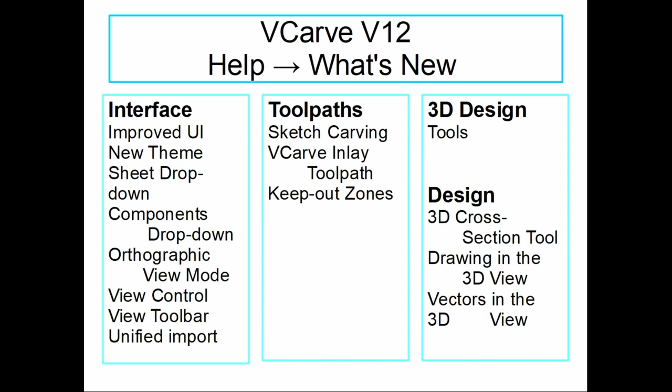Anybody deal with models very much or components? Okay.

So this is the end result of it. We've got the imported... whichever end this thing is on. There we go. Over here, the unified import is this one right there.

The third one from the left, and then the fourth one or the second one from the right. And the one on the far right is for components. So it's STL, et cetera, can be brought in there. So that one's a 3D component, this last one here.

They did away with file save and file copy and all these other things because all those file saves and copies exist in the drop-down menu. So it was just real estate that they were trying to pick up there.

Down here is some 3D modeling tools that are pretty nice. You used to have to jump all over the place to get them, and now they're right out in the open. These two toolbars right here are toggle toolbars, and they start toggling off in and out.

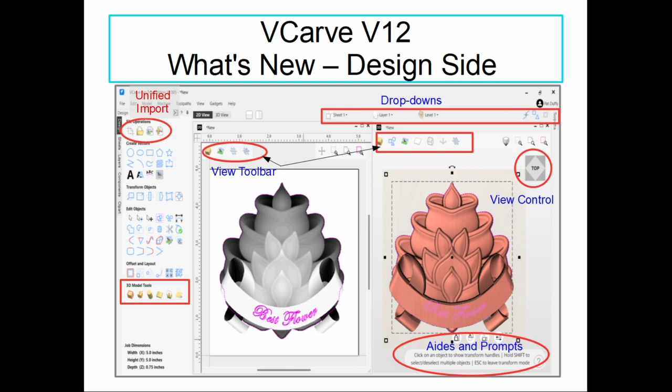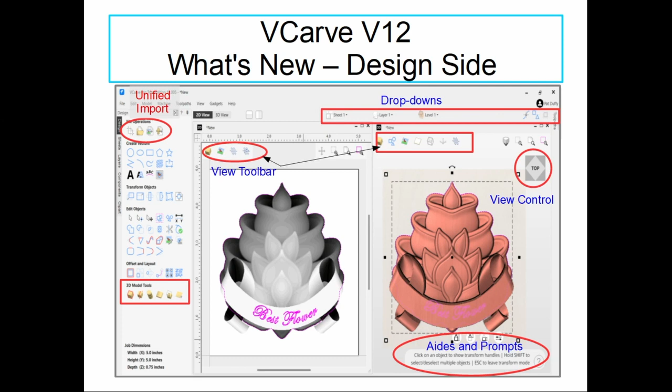This guy's nice because you can now start to rotate all around a model in an organic way. Doesn't mean much for a 2D or 2.5D, but it means a lot for model creation, because now you can look down from the top and see if the ribbon actually protrudes well enough from the flower to make it look real, or if it protrudes too much and makes it look too heavy.

So all of these things are available on the design side.

Any questions? Did anybody fool around with any of these and have any problems? Or no problems? Good, okay.

Now on the toolpath side, one of the things I found out is the best flower was actually, the word was actually right on the ribbon over on this side, on the design or vector side. They're right here, it kind of slid off, and it has to do with the perspective. Don't worry about it, it will all work out. It'll all actually get put onto the ribbon.

However, this is the big item right here. To me, when I'm doing modeling, it was always a real pain to adjust the height and to adjust the height of each component.

In this particular model, when it was first brought in, and we'll see later, the ribbon was actually sunk into the flower, which really looked terrible. I mean, it shouldn't look that way. So you have to figure some way of advancing the ribbon out of the flower or diminishing the height of the flower, or you could tilt it one way or the other.

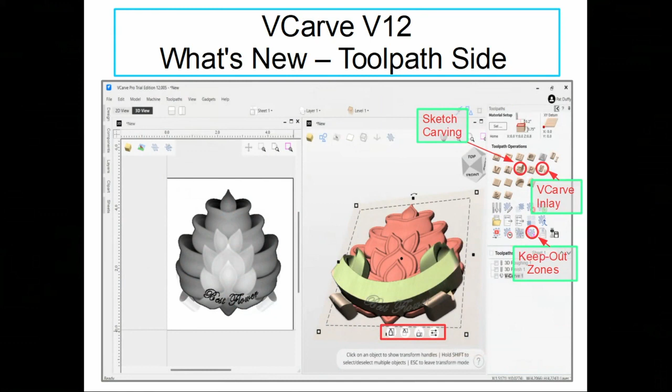You're going to remove the top spoil board? Yes, I'm going to, later this summer, right after the fair. I want to come in and spend all day Tuesday on one and then next Tuesday on the other, and replace the entire spoil board on both of them and get them back into good shape.

So these are the view control again. Okay, look into it, this guy's great. If you click on the word 'top,' it automatically rotates and positions itself to the top.

If you double click on it, it goes and presents the bottom. And you can actually click on either of these triangular sides, and it'll begin to rotate it in a side view. Isn't that the orthographic views?

No. It's being able to see the top or the side perspective, and they call it orthographic in this thing, slightly different. I had to click it 2 or 3 times before I figured out what it was doing, and then I started measuring things, and I said, 'Oh yeah, now I can see what they're talking about.' We'll take a look at it.

Good, these are again the toolbars. This is the orthographic toggle view, that's the one right there, the one with the 3 little things. The only way you can tell the difference is those 3 little fingers appear slightly different in one view than the other, and I'm not sure which is which.

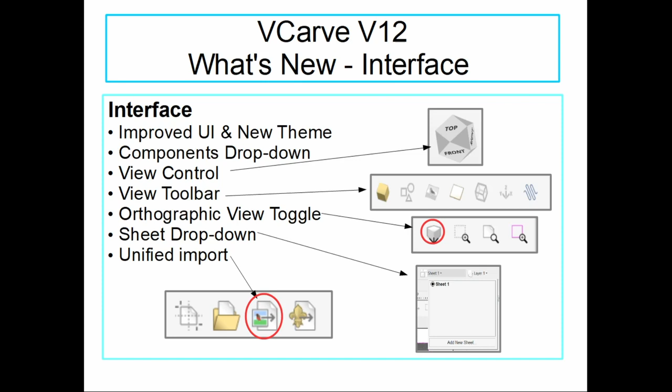This, you just surround an area that you want and click on this, and it'll fill the screen with that area you've selected. And let's see, unified import is right here, and this is your component import.

And sheets, you guys haven't used sheets yet, huh? Oh man, you don't know what fun is. Come on, sheet in there. What? That's a good sheet. Well, I was going to short sheet it, but you got that? Okay, where is it hidden?

Okay, we used to have some real nice functions. We could make a nice smooth curve. You'd hit a point here, a point here, a point here, a point here, a point here, a point here, and say curve, and it would now smooth this curve out real nicely for you.

No longer exists. You can do a 3-point curve, so you hit a point here, a point here, and a point here, and it'll make a nice little curve. You can't do anything greater than 180 degrees, so you can't hit one here and one way up here, because it turned out to be more than 180 degrees. The software, I think, barks at you a little bit.

But now this curve is under the freehand drawing. We have always had freehand drawing, but now you can adjust the smoothness of your freehand drawing. So you draw the curve that you want, which is not as easy for me as I would have thought, but you draw the curve, adjust the smoothness first, and then you draw the curve, and you can actually make that curve pretty smooth, even with a jagged line going through it.

No way. Throw away the text, go back in, create the text in the box, and then it worked perfectly. So the box becomes the boundary for the graphic, and if the graphic exceeds the length of the line, then you're going to get this message. I tried fixing it, and it was much easier to just erase and start all over again.

Boundary vectors, those used to be in the top of the design, if you recall. There was a little funny dotted thing with kind of an arrow, and I could never describe it well. Now it's down at the bottom on the left-hand side. All you do is select everything you want a boundary for. For those of you who have dealt with 3D modeling, you have to do that if you're going to cut the model out. So you just define that as select everything you want, click on the boundary, and it drops it right in.

Next thing is where to find help. Help can be found best at the help contents, and this is right inside of VCarve. So go to help contents, excellent source.

Now I'm not sure, you run Apple, don't you, Paul? No. Anybody else run an Apple? Okay, I'm not sure how this is going to work with Apple.

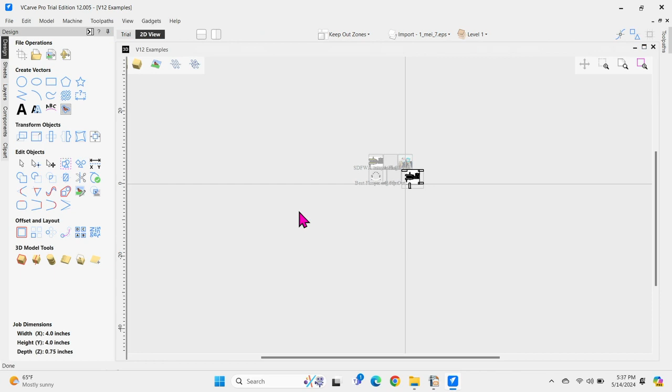Come on, good, came up. And again, I'm signed in, okay? And if you have any doubts, you can always go to Help and About VCarve Pro Trial.

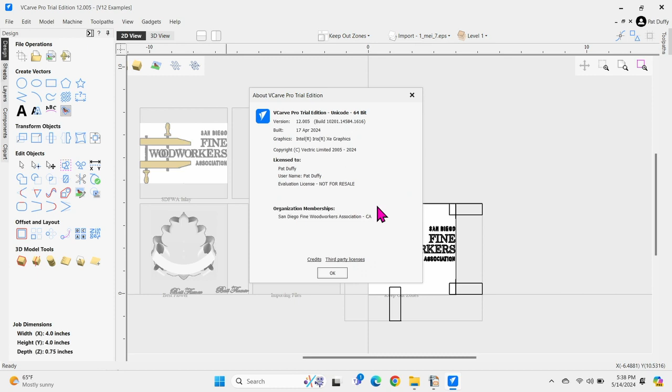It should show you San Diego Fine Woodworkers here. If it doesn't, talk to me - quietly, but talk to me. Okay, but yeah, it should all go up there. And you'll see that we're never going to get out of the trial edition, and that's one of the aspects of a makerspace. You don't get the full bore version. There's a couple of things that are going to be missing, but they shouldn't be insurmountable.

One of them is export - we can't export files out of this, okay? Unfortunately, it would be nice to, especially now that they have slicing.

But let me go to the easy one, or the nice one first. Let me do this - okay, San Diego Fine Work, that's the same file that I built out of this one. And I'm gonna make an inlay out of this. I've already imported the JPEG, I've already done the tracing, okay?

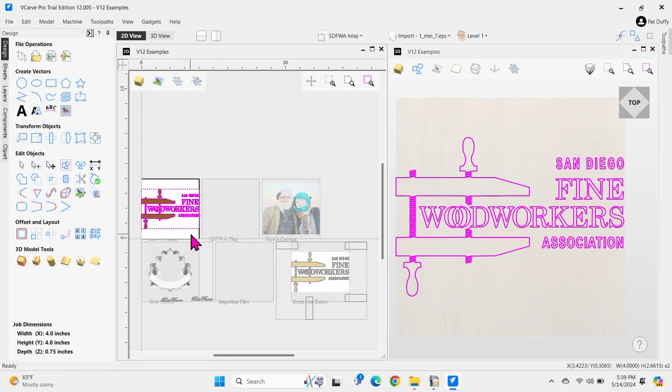Nothing's changed there. Up here, if I want to get rid of the JPEG, that's right here, boom, and now all I've got is a tracing. I can bring it back and whatever. So I'm going to split the screen, left to right, and make that bigger again. Now go over to the toolpath side.

And this is where the VCarve inlay is. There's a couple of other inlays up here. They're not as far along, this one here is almost, but it's textual, almost like marquetry.

Which I don't understand, so I'll talk about inlay instead. So all you do is click on this guy, and this is the real nice part about it. Now you gotta watch the bouncing ball.

I'm going to declare that my pocket depth is 0.15 inches. I could have made it 0.1, I could have made it 0.02. Well, you don't want it too shallow. But this is the maximum pocket depth. Now, if part of your design says that you can't get that V bit between vectors to a depth of 0.15, it's not going to go down 0.15, it's going to go up. And later we'll see, we're going to get a notification about that situation.

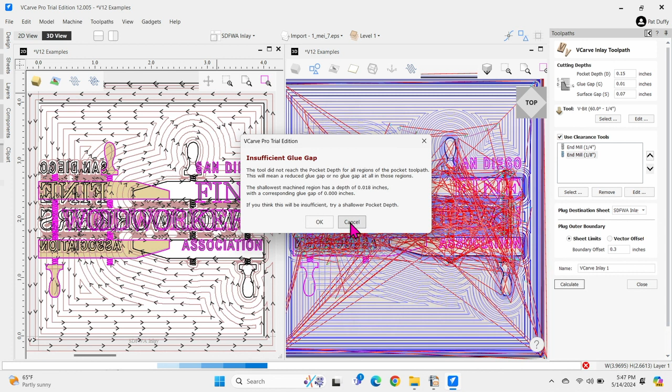All your tool paths are on the same sheet. Now you got to figure out which tool path goes to what, and holy cow, man, oh man.

We'll get back to that glue gap problem in a second here. So what I should have done is gone over here to the plug destination sheet and said, okay, I want to put it into the SDFWA plug. Okay, watch this. Calculate. Boom, boom, boom.

Now, insufficient glue gap is what we were talking about up here. It still works, but there'll be places that will be too shallow to have a glue gap. And one of the places, for example, I'm going to say, okay.

What's that say? Empty tool paths, yeah. The quarter inch end mill won't fit on the pocket side. There's no place big enough for the quarter inch end mill. So it's going to have an empty tool path because I said I wanted a quarter-inch end mill. Now's the time to go in and delete that empty tool path so I don't get really fouled up when Carbide Motion comes up and asks me for a quarter-inch end mill.

It won't let you save a tool path that's empty. I ran into that. Oh, you did? On the weekend, yeah. I had one where my end mill clearing one was empty, and the save was actually grayed out. Ah, so you couldn't save it to the G code file. Good, good.

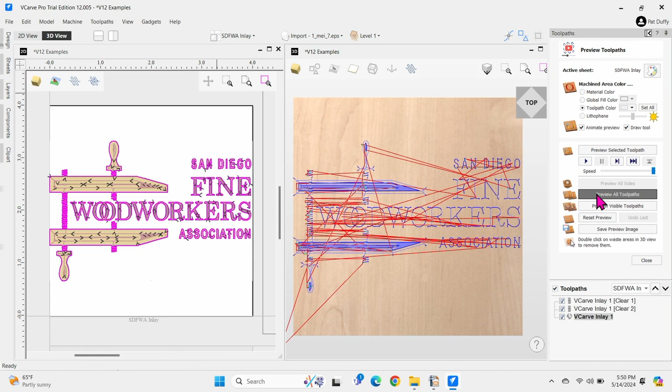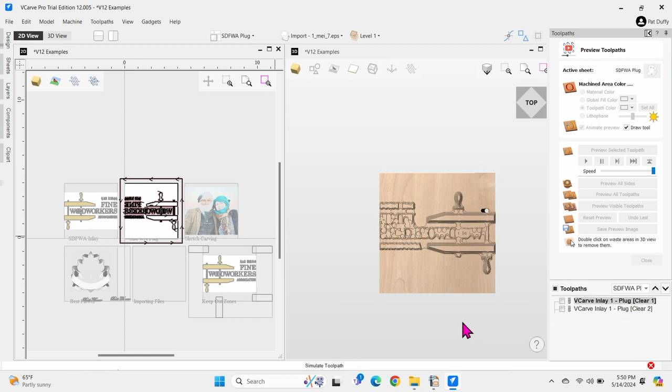So, at any rate, this is created, now we've got the reset preview and preview all. This has created the pocket side of the house. And if I were to scroll back a little bit, we'll see that right over here, there's the other side of the house.

And it's created it. Now, the grand part about this, and that's for those people who think ahead, which I never do, by the way, but those people who think ahead and may have a small job like this, okay. So they've cut the plug first in this particular sequence that I'm going to give you. You'll cut the plug first, and then you'll come back and you'll cut the pocket inlay second. Don't remove the inlay from the board. Leave it there. Glue the two together and figure some way of getting a compression jack going from the ceiling all the way to the top of this guy to hold it down and glue it in place.

And sometime later, I won't tell you how long glue takes to dry, but sometime later, you can actually mill off the top of this. Okay? And you say, well, wait a second, how far should I mill down? Isn't this nice?

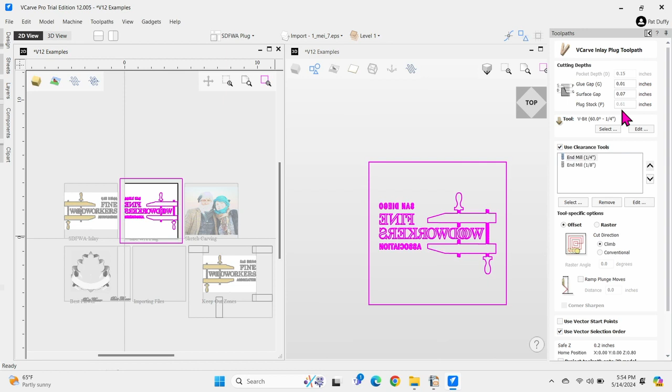It will not try to condense that plug or the artwork down to fit the material. Right, obviously, that wouldn't be so good - it wouldn't fit. Yeah, so you can, yeah, it works.

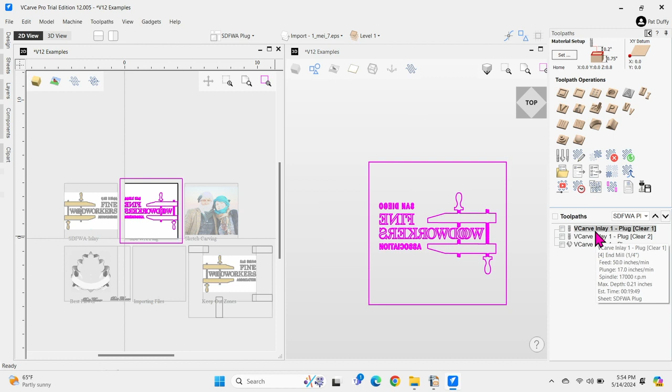But then you still send the individual sheets separately to the Object Motion. So when you get back to the, all of these here, these are just for the plug. Okay, so when I go to save that tool path, I better tell myself that I'm saving the plug side and not the inlay side, because I'd hate to put the wrong piece of wood down.

So the first two of those are for the two different end mills? Yes, and then the third one is for the VCarve, right. If you hover over it, it will tell you what the tool is for, so the quarter-inch end mill does a lot of the hogging out. Right, okay, and then coming down in here, this will be the eighth-inch end mill, and it just does some detail work.

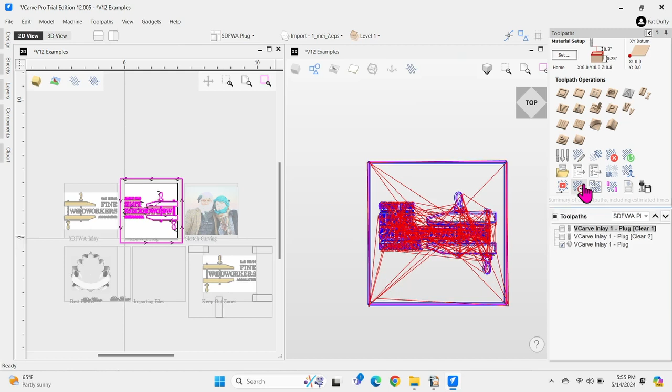Right, and then of course the V-bit, it gets where everybody else couldn't. And you have the time calculation that shows for all through those?

Yeah, so when you do time summaries, be sure and have them all marked, because right now it's only an hour and 9 minutes. But when you have them all marked, it becomes an hour and 54 minutes. So I'm gonna say that's gonna be - the actual job's gonna take, not accounting for setup and tool changes, etc. - your actual job is gonna actually take longer than that.

When I did the other one, it was supposed to be, I think, 38 minutes, and it took closer to an hour. But there is a lot of detail going up and down work, vertical work on that thing.

So yeah, I think one of the tutorials on V12 has a correction method for getting the time estimate closer to reality. So you have to check on the tutorial sites. Okay, yeah, we'll take a look at it.

I really prefer 60. I think, to me, when I look at it, aesthetically it's more pleasing. Other people say, oh no, a 90 looks much better. So it's in the eyes of the creator, not anybody else. If you like 90, you stay with 90. If you like 60, the advantage to using a 60 on inlay is you get more depth to the cut.

And you had that issue when you made your flag. He made a beautiful flag, and he used a tapered ball nose, I think, eventually, right? With like a 15-degree angle? Less than that, I think it's more like 6 or 7. The sharper you are, the more detail you probably get too.

That's really interesting. Well, the stars, as you cut them, they've got a bead coming down on each leg. So when you put it down in, it won't fit if the bit gets too big. The way it comes is that the smaller the V, you can get tighter in the grooves as it's coming together, so you can actually get it to fit down there pretty tight.

And why would you want it to fit down pretty far? Well, because when you're sanding it, you can sand the inlay right off. Yeah, I've done that. And it was to be a cutting board, so quite possibly it'll be sanded at least 1 or 2 more times. Unless they're like the cutting boards I make and people put them up on a wall and don't use it. So there's reasons for making very deep pockets, and reasons you really don't care.

And you have not done one where, instead of bandsawing, you're just surfacing down the plug, right? No, I haven't, but there was somebody in one of the classes, she was in an intro to CNC, which really surprised me, and she did inlay. From the intro to CNC class. She really made a quantum jump.

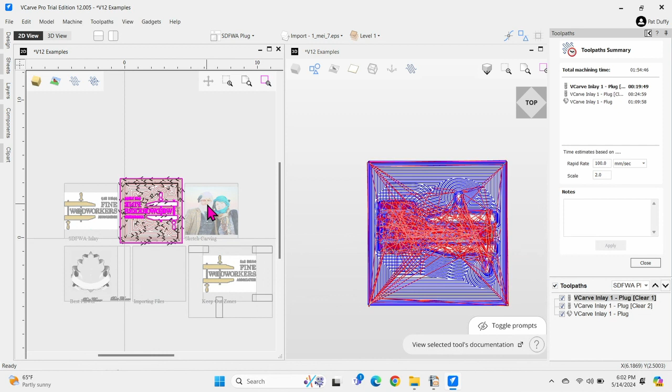And she ended up using surfacing. Super glue to hold everything together, and then she came back and, yeah, I was gonna say, if one side takes an hour, the other side's gonna take another hour. Yeah, you gotta put the glue on. I think your slot time will be over before your glue dries.

If you own your own CNC machine, there's a lot of things you can do. If you have to get shop slot time, you're kind of limited.